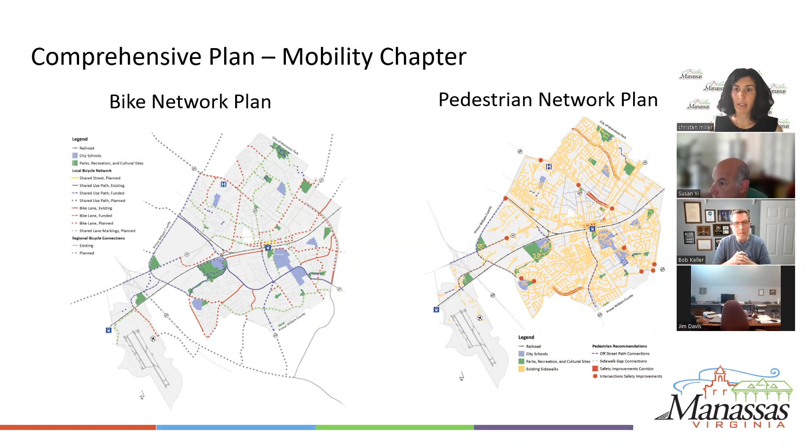First, I wanted to talk about some recently completed bike and pedestrian initiatives. So 13 miles of bike facilities were added since FY19 as part of the CIP and paving program. Every time a road is being paved, we check to make sure that the roadway is included in the bike network plan. If it is, and there's no conflict and enough space, we add bike lanes. You may have seen a lot of different bike lanes added that way. The last bike lanes were added on Stonewall Road.

2 trails were recently completed: the Dumfries Trail on the west side of Dumfries from Millick to Hastings - you can see a picture on top, it's next to the new fire station - and the Osbourn Trail, a concrete trail next to Osbourn High School, which is being completed as we speak.

The city has also been expanding bike parking with 98 bike racks, 10 bike lockers, and 1 repair station installed since 2017, focusing on parks, schools, public facilities, and downtown. The 10 bike lockers and the repair station can be found in the parking garage.

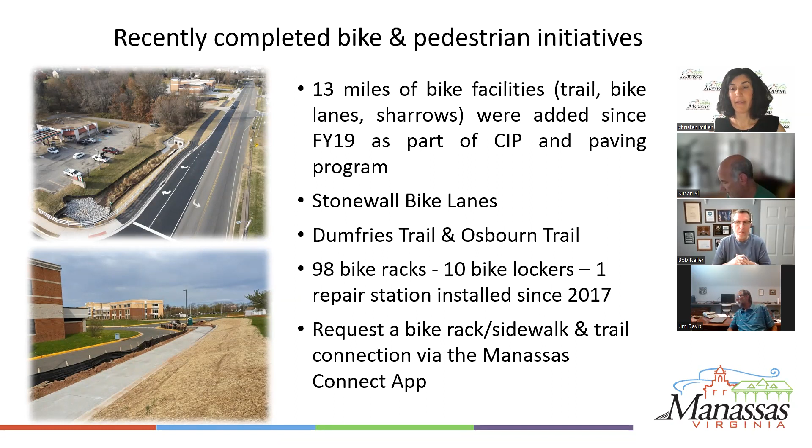I also wanted to let you know that if you would like more bike parking, or if you'd like to connect your neighborhood to the trail network, you can send a request via the Manassas Connect app, and we'll review those and staff will see if they're feasible. Please keep in mind this will be depending on budget availability.

So we talked about what was recently built. Now I wanted to talk about new projects currently in the planning phase. Here are the maps again from the comprehensive plan, because every project originates from the comprehensive plan. Then we develop a concept, about 10% design, to have an idea of what the project will look like.

Then we start the public involvement phase, which is what we're doing now. Once we hear back from you, we'll look for funding, and once the project is funded, it will be added to the capital improvement program. At that point, the project is handed off from the community development department to the engineering department for design and construction.

So I'll go over those 4 projects. First, the Redoubt Road Trail between Workman Court and Redoubt Road. Then there's the Godwin Trail between Wellington Road and Sudley Road. There's a Dumfries Road facilities project between Hastings and Wellington Road. And then the Sudley sidewalk between Grant Avenue and Mathis Avenue.

I'll start with the Sudley Road sidewalk project. This is proposing a new 0.7-mile sidewalk on the east side of Sudley Road between Mathis Avenue and Grant Avenue.

There will be a 5-foot sidewalk up to Portner and then a 6-foot sidewalk between Portner and Mathis Avenue. As you may be aware, there is already an existing sidewalk on the west side of Sudley Road. If you've used it, you may have realized it's not very comfortable as a pedestrian because there's no buffer between the sidewalk and the roadway, and there's a lot of traffic on Sudley Road. So this project proposes 2 alternatives with a buffer, and we'll go over those in a bit. The project cost is from 3 to 3.1 million.

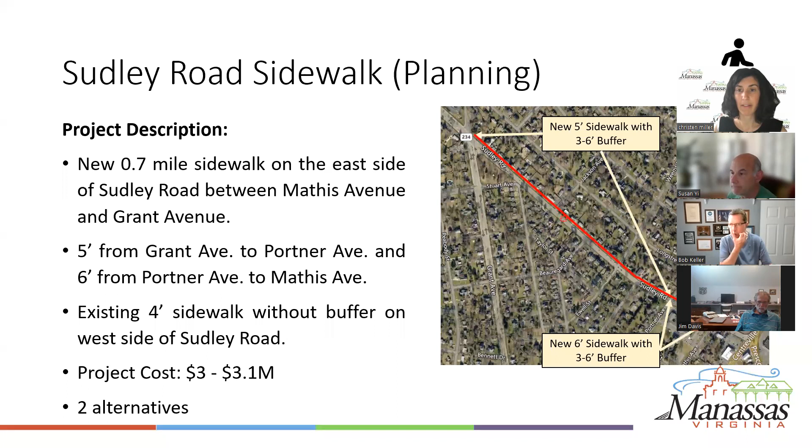Here are the 2 alternatives. The first is a 6-foot buffer between the sidewalk and the roadway, and alternative 2 is a 3-foot buffer. Alternative 1 provides a wider buffer and consequently more comfort for pedestrians. However, alternative 2 provides a narrower buffer but has less right-of-way impact on private properties. Like any project, there are trade-offs, and it's about finding the right balance.

If you'd like to look at the concept for more details, please visit the project webpage at manassasva.gov/Sudley sidewalk. You can also take a survey and vote for your preferred alternative. We want to hear from you, so please let us know what you think about this project.

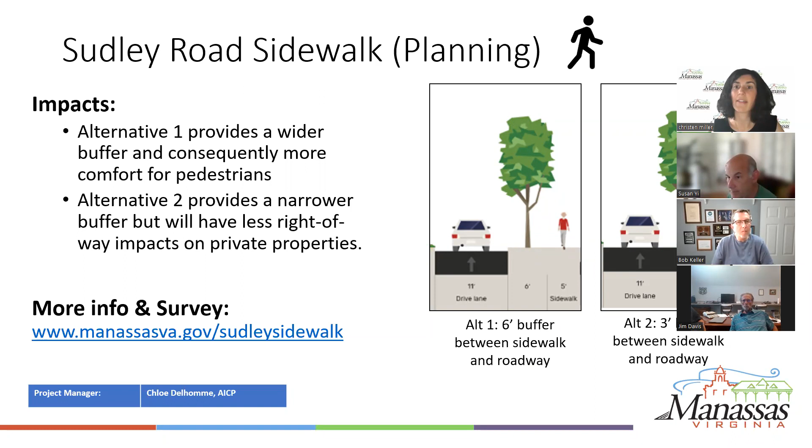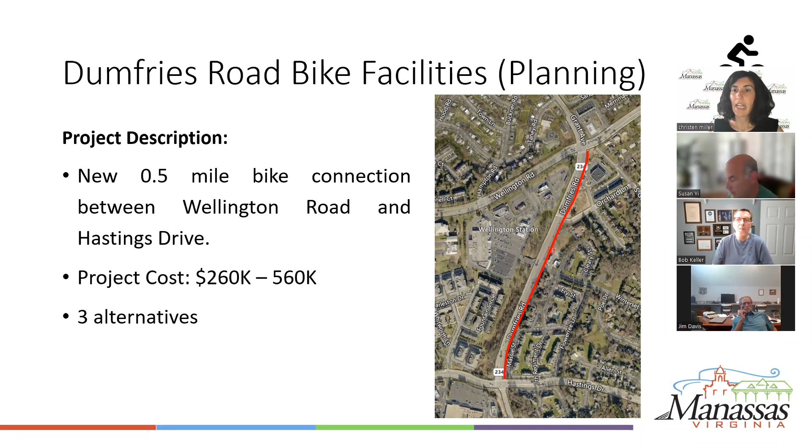The second project is the Dumfries Road bike facilities. This includes a 0.5-mile bike connection between Wellington Road and Hastings Drive. The cost ranges from $260,000 to $560,000, and the city has been looking at 3 alternatives.

The first alternative, shown in green, is alternative D, which provides protected bike lanes. There will be 2 bike lanes in each direction of the roadway with protected concrete barriers. This is the most expensive alternative because the median and curb have to be impacted to provide adequate width for the bike lanes and the barrier.

Alternative E1, shown in orange, is the second alternative, proposing a buffered 2-way cycle track. It uses an underused turn lane on Dumfries and turns it into a cycle track. This is the least expensive alternative because there is no impact on the curb and it uses existing pavement. The third alternative, in blue, is alternative E2, also a buffered 2-way cycle track.

It's a hybrid alternative. It's a cycle track that, coming close to Walgreens and the intersection with Wellington Road, turns into a shared use path to limit conflict at the intersection and transitions east into the Grant Avenue Trail. This has a mid-range cost of $350,000.

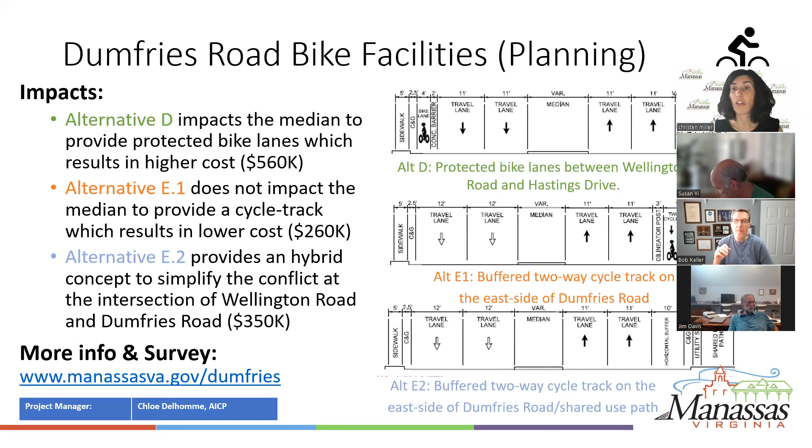More information and concepts for all 3 alternatives can be found on the project webpage at manassasva.gov/Dumfries. Please feel free to check it out. You can also take a survey and vote for your preferred alternative, or provide comments on the project itself.

The third project is the Godwin Trail project north, between Wellington Road and Sudley Road. It proposes a new 10-foot wide, 0.9-mile shared use path on the east side of Godwin Drive between Wellington Road and Sudley Road. It also includes pedestrian improvements at Ashton Avenue and Godwin Drive.

This has been requested by the community many times. There is no existing pedestrian crossing right now on Godwin Drive at that location, so this was the opportunity to include those improvements as part of this project. The project cost is about 8.3 million.

Again, if you'd like to see more details of the trail and where it goes exactly, please look at the concept on the project webpage at manassasva.gov/Godwin, and also provide your comments.

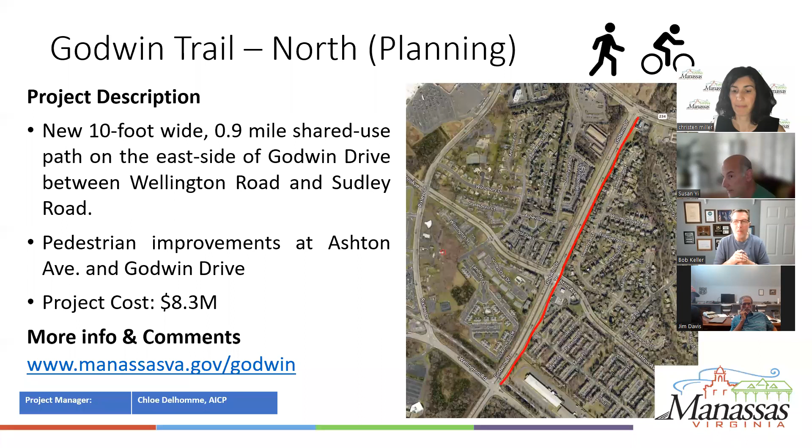The last project in the planning phase is the Redoubt Road Trail, a new 8 to 10 foot wide, 600 linear foot shared use path between Wakeman Court and Redoubt Road. It basically connects those two cul-de-sacs and provides access to the VRE station.

As you may be aware, VRE is expanding the Broad Run station and will provide a north access on the north side of the railroad track. It will be multimodal for buses, bikes, and pedestrians, and there will be a pedestrian tunnel going under the railroad track to provide access to the platform on the other side.

The concept for this project is under development, so you won't find it yet on the project webpage at manassasva.gov/redoubt. However, as soon as it's ready and available, it will be posted on the website, so you can keep track of the project and still provide comments at this time.

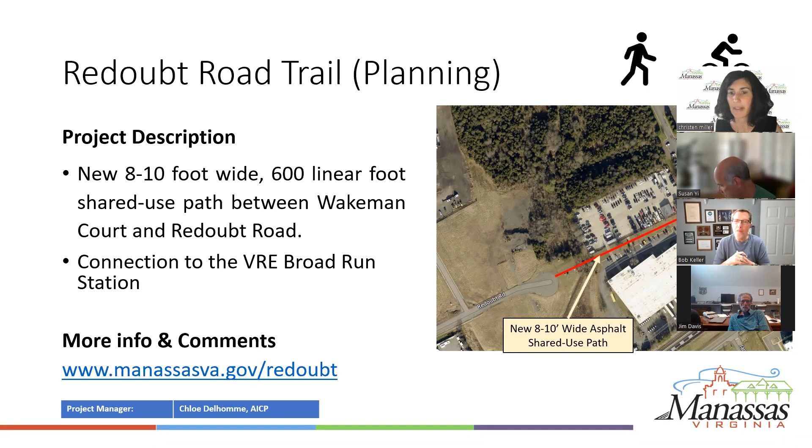So we discussed what was recently built, and we discussed what was coming up in terms of planning projects. Now I wanted to tell you about the projects currently in the capital improvement programs, which are currently funded. I wanted to give you a comprehensive overview, but we're not going to discuss all those projects today, we're going to discuss the ones in bold. The others are part of bigger projects.

I'll go over those starting from the bottom left with the Gateway Trail between Wakeman Drive and Godwin, which will be discussed today. The Nokesville Trail between the Prince William County line and Godwin Drive, part of the Nokesville Widening Project, is currently under construction. The Godwin Trail, between Wellington Road and Hastings Drive, will also be discussed today.

The Dean Drive bike lane between Route 28 and Foster's Drive is part of the Dean Drive Extended Project, which is under construction. The Dean Drive bike lanes between Foster's Drive and Wellington Road, part of the Dean Drive Widening Project, are funded for FY26.

The Stonewall Park Trail between Stonewall Park and Liberia Park is funded for FY25. The Wellington Trail, a small but vital safety gap in the Wellington Trail, will be discussed today. And the Grant Avenue Trail between Prince William Street and Wellington Road, part of the Grant Avenue Streetscape project, is currently in design.

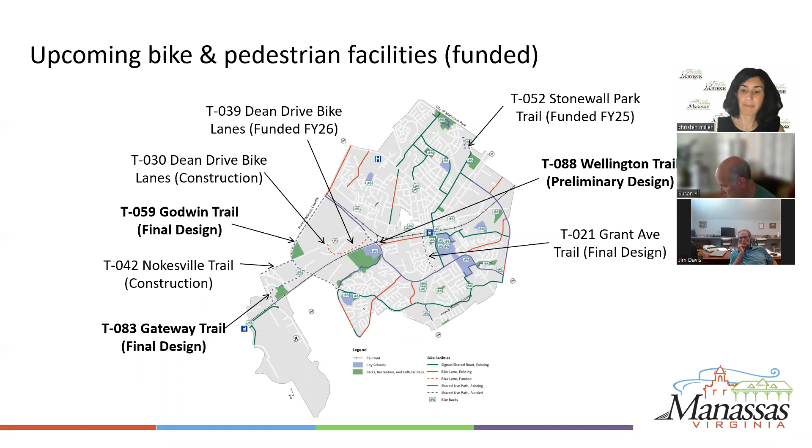Now I'll turn it over to Nyika to talk about the Gateway Boulevard project.

Thank you, Chloe. Good afternoon, everyone. My name is Nyika Roberson-Ramos, and I am the project manager for the Gateway Boulevard Sidewalk and Trail project. This project will install a 10-foot wide shared use trail along the north side of Gateway Boulevard, and a new 5-foot wide sidewalk along the south side of Gateway Boulevard.

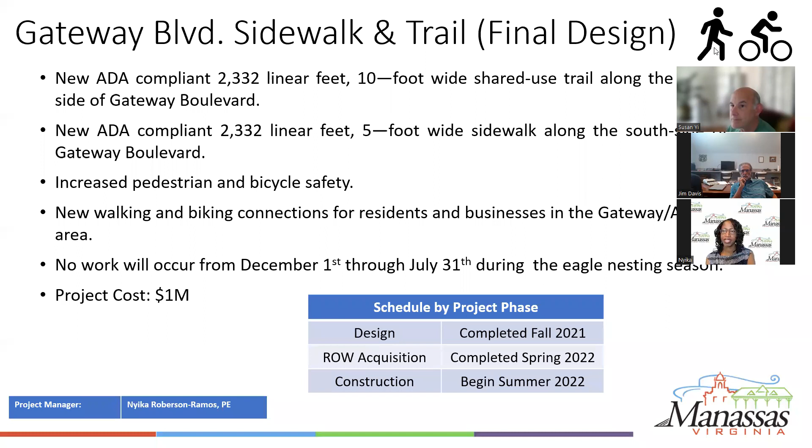Next slide, please. Here's the project location and the existing conditions. Next slide, please.

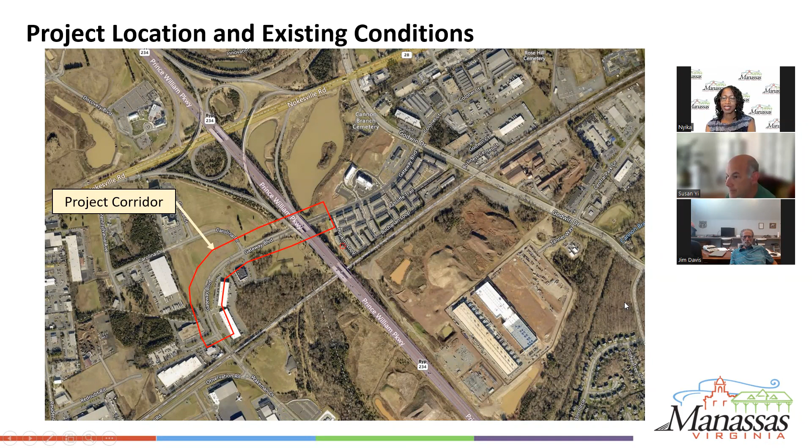Here's the proposed conditions, and you can see the new 10-foot wide shared use trail along the north side of Gateway Boulevard and the 5-foot wide sidewalk along the south side. This project will provide new walking and biking connections for the residents and businesses in the Gateway area. Construction is scheduled to begin this summer for 3 months, and the project cost is $1 million.

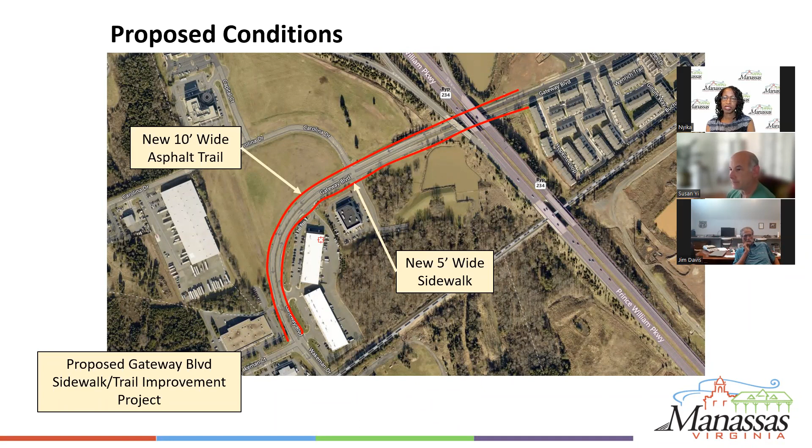Next slide, please. I'm also the project manager for the Quarry Street Streetscape project. This project will install a new 5-foot wide sidewalk along the southern side of Quarry Street, and will replace the existing 4-foot wide sidewalk along the north side of Quarry Street.

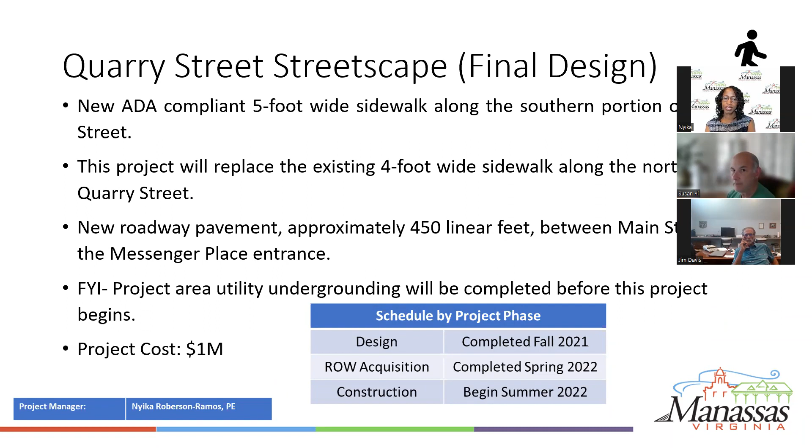This project is scheduled to begin this summer, and the current utility undergrounding project should be finished by this June. The project cost is $1 million, and we'll also be paving the road between Main Street and the Messenger Place entrance. I'll now turn it over to Sung.

Thank you. Good afternoon. My name is Sung Chung with the engineering department. I'm the project manager for the Godwin Drive Shared Use Path project.

This project is to connect existing trails between Wellington Road and Cannon Branch Trail. It's mostly 10 feet wide and partially 8 feet wide due to constraints, and the environmental impact will be minimal as the shared use path aligns with the existing roadway. This project is budgeted for 1.7 million, will be in construction this summer, and is expected to be completed within 12 months. Next slide, please.

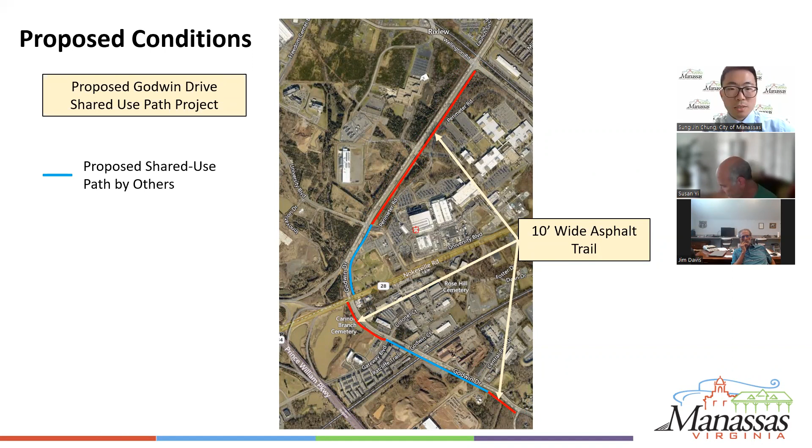Next slide, please. There are three main segments that will be built by the city, highlighted in red, and portions of the shared use path highlighted in blue will be built with other developments. The project also includes 4 sidewalk improvements as well as 1 railroad crossing within the project limits. I'll pass it on to John for the next project.

Thanks, Sung. My name is John Keenan. I am the project manager for the Wellington Trail project. As Chloe mentioned earlier, the Wellington Trail is located along Wellington Road between Prince William Street in the south and Nokesville Road in the north.

It is basically a connector to fill the gap between the existing trails both to the north and south along Wellington Road. Once this connection is made, it will allow for continuous trail access from Liberia Avenue in the east all the way to Godwin Drive in the west, essentially from the eastern city limit to the western city limit.

The total length of the project is about 1,800 feet, and the connection will be mostly a 10-foot wide asphalt shared use path. It's going to be located within the right-of-way along the east side of Wellington Road, and there are very minor right-of-way impacts expected at this point in design.

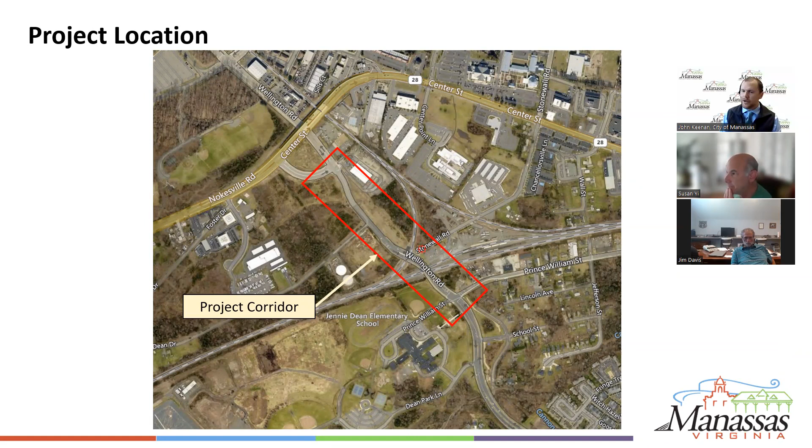After review of the project with Norfolk Southern and some negotiations, the trail is going to have to be narrowed to 6 feet where it crosses the tracks in order to meet their requirements for grade crossing safety. The total project cost, including all phases, is estimated to be about $1.2 million.

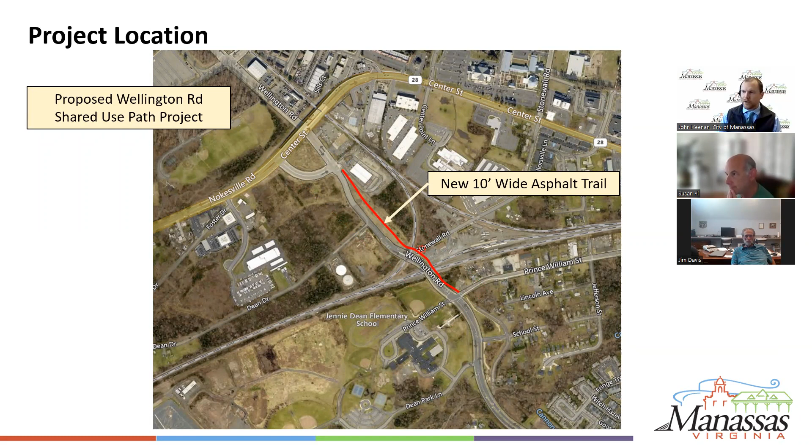Design began in December of 2021. We've just completed the 90% design and are finalizing the environmental document. Construction is anticipated to begin in the summer of 2023. And I'll pass it back off to Chloe.

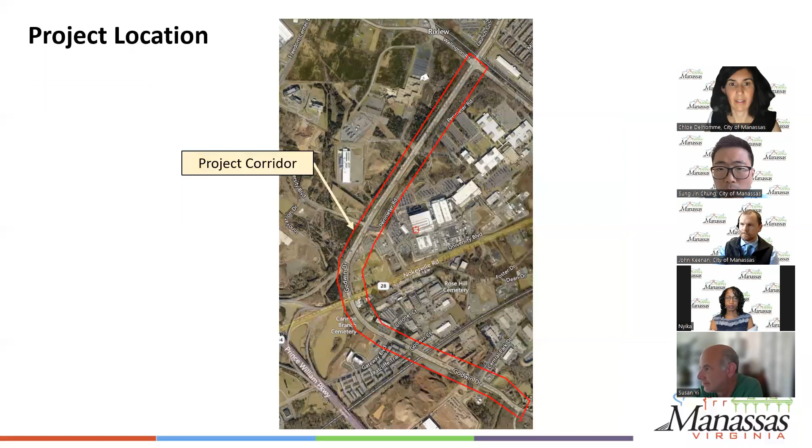It does connect to the rest of the plan, because as I mentioned and showed, I can go back in the slide. Right now it doesn't here, but on the overall map you can see how it connects to the overall network. It doesn't connect now because the network has to be built one piece at a time, but it will connect over time. The bike lanes were installed to provide facilities for bicycles, but also to calm traffic.

We had a lot of complaints from the community about speeding on Stonewall Road, and traffic calming is about narrowing travel lanes so people drive slower, and bike lanes help do that. So that was also a response to that type of complaint.

Got it. The next question: has Manassas expressed interest with adjacent jurisdictions about building connections so city residents can...

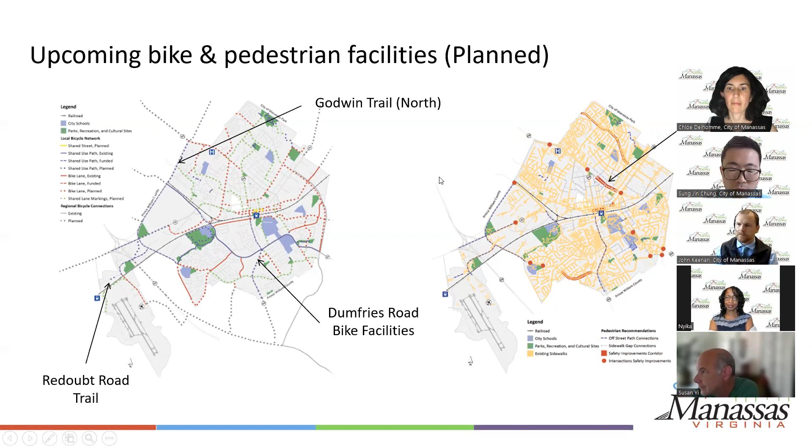Nyika, do you want to take that one? Yeah, maybe I can speak a little bit. So if any private property is impacted by the city project, we typically use our consultant to reach out to the property owners and start the right of way or easement acquisition process during the design. That's pretty much how the easements and right of way acquisition and negotiation starts, about the 60% design.

Great. Thanks, Sung. Yeah.

The next question: the bike lane on Rolling Road allows for on-street parking. Why was this design not used for Stonewall Road as well? I think Chloe addressed that question earlier, that there's a different pavement width, different roadway width on rolling, so there is room for both the parking and the bike lane. That was not the case on Stonewall.

There are several other questions here about the Stonewall Road bike lanes. I think we've talked about those a lot through this point. There are a few questions down below about other projects. So we're taking note of all these comments on the Stonewall Road bike lanes, and we will be publishing all the comments that we received following the meeting.

The next question, from Robert: most of the other trails are not adjacent to homes. The Godwin Trail North is adjacent to the backyards of the houses along Sweetbriar Street. The elevation of the trail will enable users to view over the 6-foot privacy fence behind those homes. Those homes will need higher fences to preclude trail users from viewing into their bedrooms. Can this project include permits of 10-foot high fences and include installation of those fences?